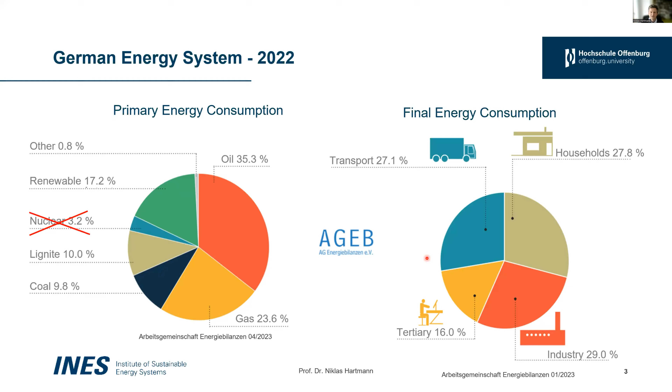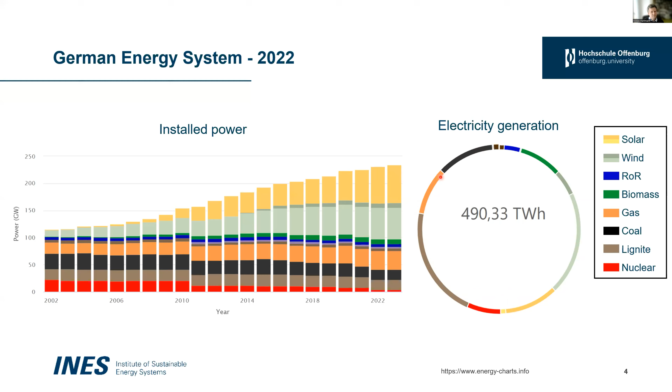And on the other half of this pie chart, you see the conventional and nuclear generation, heavily dominated by lignite currently. And this is, of course, a result of the war in Ukraine, having our gas system considerably reduced during the last 2 years to roughly 10%. Okay, so this is the installed power and the electricity generation in Germany.

And I'm coming now from the current status to our climate goals in Germany. I want to show that by showing you the annual emissions of CO2 equivalents in this graph, for different demand sectors: the energy sector, industry, buildings, transport, agriculture, and waste from 1990. We always compare our climate goals to 1990 in Germany. And we started with 1,200 million tons of CO2 equivalents. Sorry, there's a 'millions' missing, here it is. We declined up to date to roughly 700 million tons of CO2 equivalents.

And then we set out a path to the year 2045 to reach climate neutrality in the German energy system, having clear sectoral goals for the years 2030, 2040, and even in between. So that's where we are heading in Germany, reaching climate neutrality in the year 2045. And you see some interesting aspects here. Some emissions are highlighted in the agricultural sector, which are very hard to decarbonize completely. So we are expecting some negative emissions, especially in the energy sector and maybe also in the industry sector, which is of course heavily debated. Okay, so this is our path into the future.

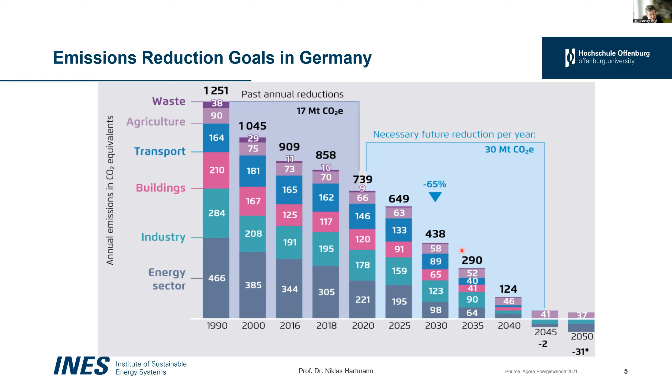And what are the key aspects of this model? The model works myopically. So we start with the year 2020. We have the current status of Germany built into the model. And then we optimize on an annual basis the power generation and the expansion of the whole system.

And I'm just naming some highlights. Anas will go a bit into detail. Here, where are we good with this model? We are good in showing the regionality of this transition path.

Yeah, we can have regional limits for certain technologies integrated. We can have regional potentials and also overall potentials for the German energy integrated. And we can combine it with some CO2 cap limits and also some CO2 tax limits over the years.

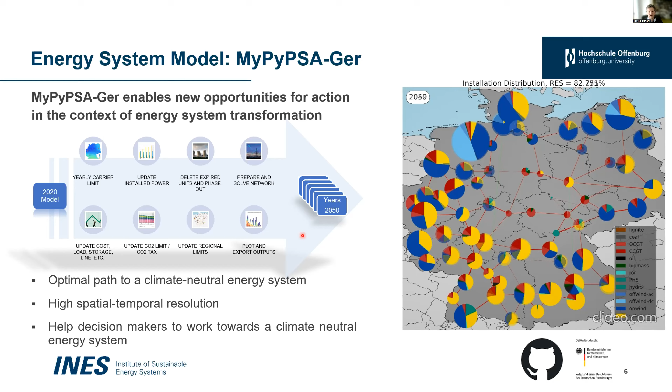In the end, we will work annually our way through till the year 2050, having a decarbonized system, hopefully, in the year 2050. Okay, that much to the model of the German energy system. And I want to give in 2 to 3 minutes the basis of the transition path. Anas will also work on the industry sector.

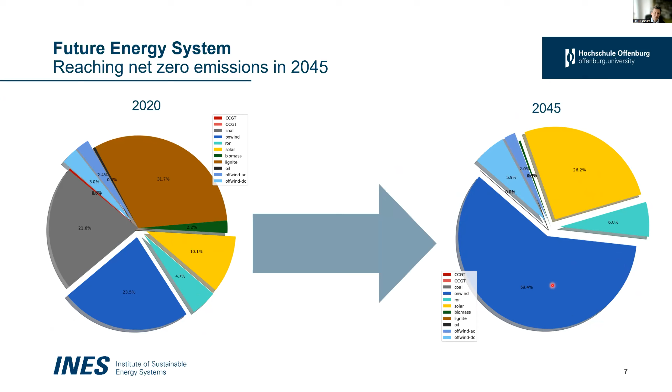And in the end, this will be transformed within the model to the year 2045, fully dominated by renewables. Of course, wind onshore and wind offshore are the key technologies, including solar PV, for a renewable system in Germany. If I go a bit into detail, I just want to highlight a few aspects of this transition path.

What we can see, of course, and this is an input to our model, we force it to have a coal phase-out until the year 2035. We have an agreement and a law in Germany phasing out coal until the year 2038, but there are high chances that we get it done much faster. So there's the chance to get out of coal anywhere from 2030 up to 2038. So we force the system to run out of coal in the year 2035.

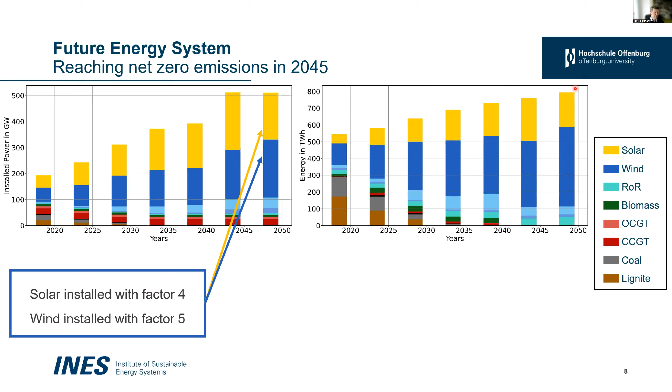The last thing we can quite interestingly see, and I'm coming now to the flexibility demand, is that mainly CCGT, so combined cycle gas turbines, are used as the main flexibility, of course running out of the system during 2040 to 2045 to fully decarbonize it. Nevertheless, until then, CCGT is heavily used just as a flexibility. So not in major generation parts, not in terawatt hours, but on a small scale in temporal resolution, ramping up CCGT to add flexibility to the system.

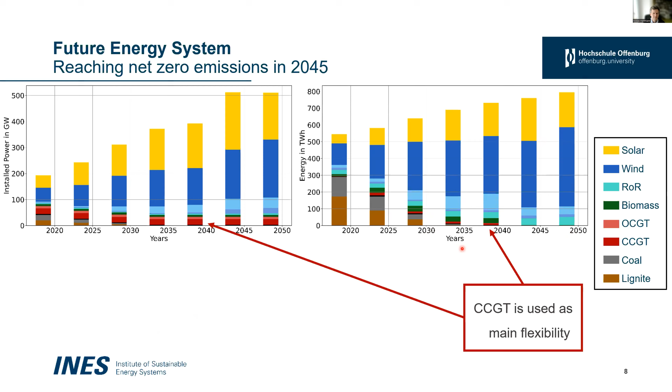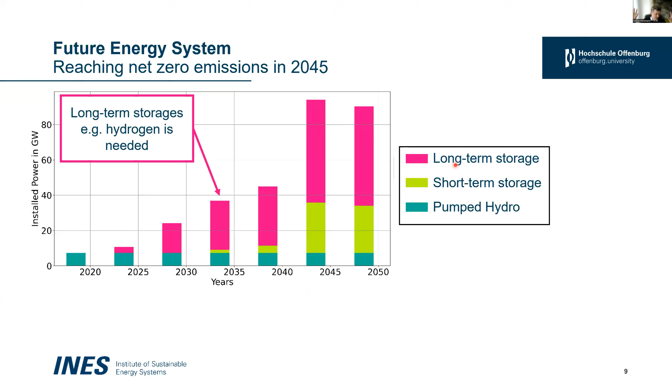Looking at other forms of flexibility, we see in our model that there's just a huge demand for flexibility. Now, in Germany, we have roughly 7 gigawatts of installed pumped hydro storage. To cope with that renewable system, we need to ramp it up until the year 2045 to 80 to 90 gigawatts of installed capacity, interestingly focusing mainly on long-term storage. So we have the picture of a hydrogen storage, weekly, a bit higher storage capacity, but for us it is a long-term storage. That's the first need.

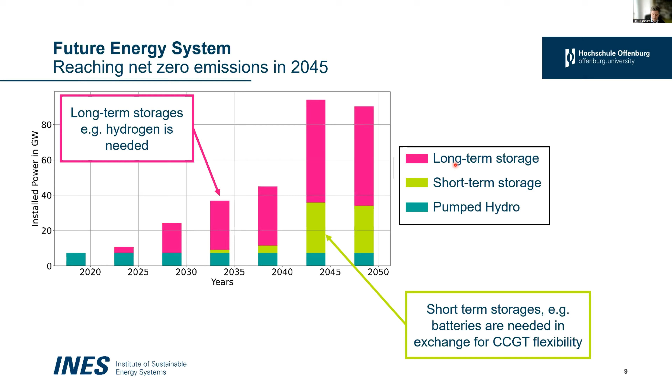The second need, coming in the year 2035, is also some short-term storage. And in our model, the short-term storages then take over the flexibility generation of CCGT, which I showed in the graph before. Short-term storage, just for everybody to have a picture behind it, would be batteries, very, very short-term.

All right, a quick summary before I hand over to Anas: in the long term, a system with 100% renewable energy is possible, but highly demanding and challenging. Of course, everybody knows that, hopefully. And flexibility, as we see in all our model runs, is or will become a crucial element in the RES-dominated energy system. So whoever handles flexibility correctly is basically the winner of the future energy system. Battery storage and hydrogen are needed on a large scale.

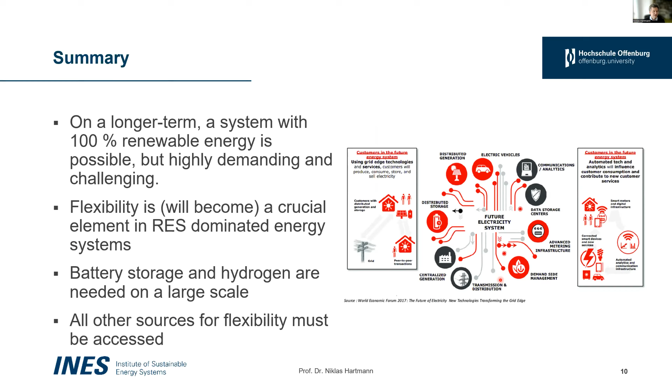And then very importantly, and that's why we did that model, that project, is we need to tackle all other sources for flexibility. With that picture on the right-hand side of a future energy system, from the World Economic Forum, a bit old, but you see all the possibilities. One possibility, demand-side management within industry, especially within small and medium-sized industries, has not been researched very much, and that was the focus of our project. With the climate stripes of Germany getting warmer and warmer in the last years, I want to hand over to Anas for the second part of this presentation.

Thank you, Niklas.

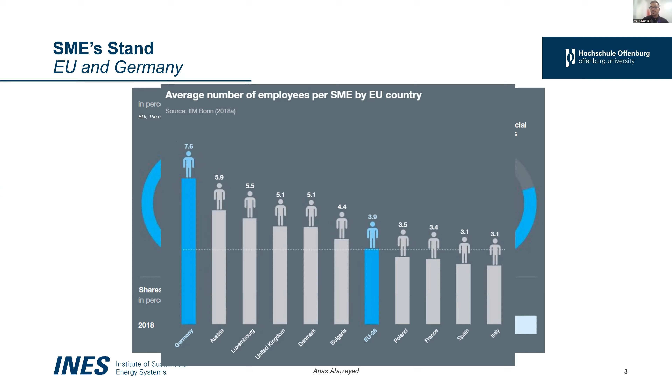So if you look at the current status now, we have roughly 360 or 370 terawatt hours of electricity into the industry. But by 2050, this is expected to increase heavily. There will be a huge electrification process, with a significant increase in efficiency and productivity. So there is a constant progression of the total industrial energy demand, but the energy carrier itself is changing. We see that there is more electricity being involved in the system.

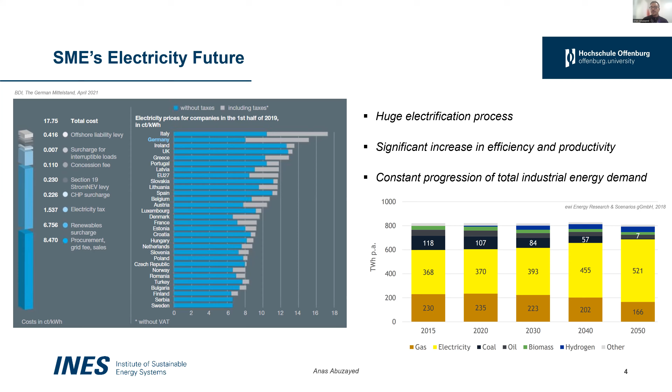Looking at the actual SMEs, the enterprises, the demand there is very heterogeneous, and detailing the electrical demand is usually very difficult, very demanding, and mostly neglected. The spatial and temporal characteristics of these demands, especially in Germany with this vast amount of enterprises, would make a big difference in the energy system modeling or analysis. However, mapping this difference is basically needed and should be included in most of the models. So that was what we tried to do in this project.

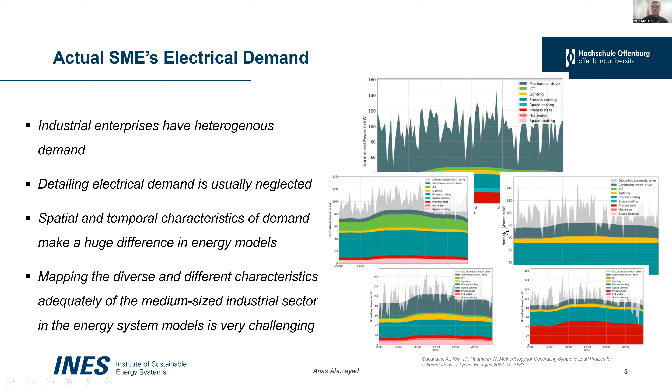So the motivation of this work, in bullet points: first, what is the impact of this SME flexibility on the national energy transformation goals? And on other flexibility measures - we saw what Niklas presented, that there would be a massive demand for flexibility. Conventional flexibility will no longer be valid or present in the system by the decarbonized future, so we need to explore other flexibilities. Another part of the motivation is how can this flexibility from SMEs participate in network congestion management and secure the supply of electricity? And most importantly, how can we quantify or analyze the flexibility from the demand side, from the industry?

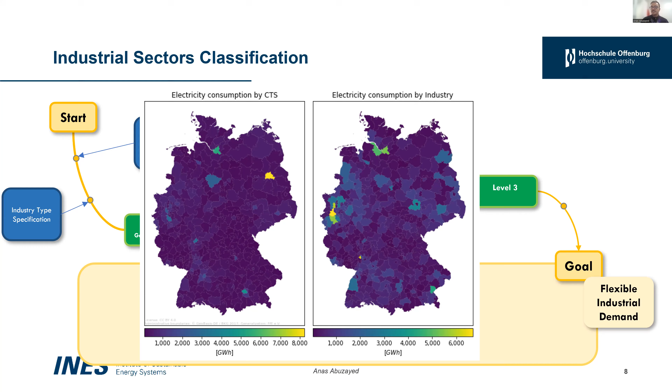So moving to the model development, how we mapped the electrical demand from the SMEs - just briefly, I want to show it. We have the goal of having flexible industrial demand within our model or system. So we start with having a spatio-temporal disaggregation per industry type, since we have different industry types in Germany. Then we have a general aspect in there - how can we proceed? We have different regionalities. As Niklas already mentioned, the main feature of our model is the regionality in Germany. This is very German-specific, that different regions have different demands, different SME contents, different companies in them. So this is very important to map inside the model.

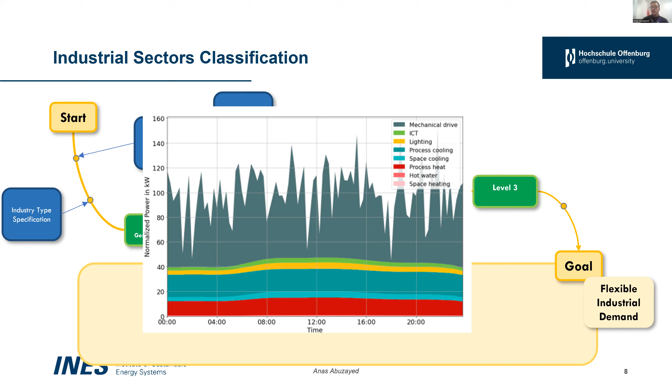Secondly, we have the synthetic load profiles and the industrial load profiles that need to be mapped within the model, by having different processes, different times, different regions. How can these basically differ temporally inside the model. Finally, after we have the industrial load profile, we need to have the end user classification and the disaggregated load profile inside the industry.

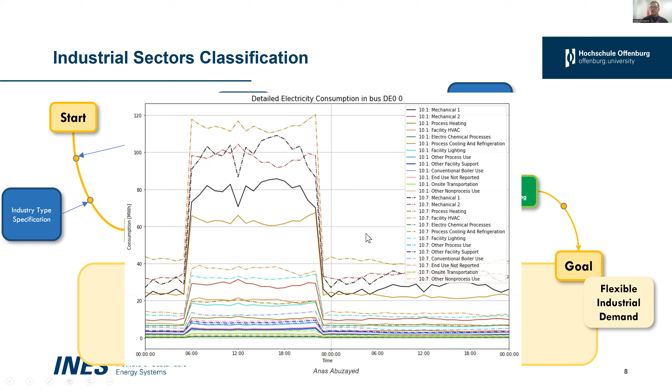So basically, this is how it looks like inside our model, with a very high detailed level of end user classification of the processes within any industry. You can see different processes such as mechanical, heating, HVAC, or electrochemical processes. All of these are mapped within our model so we can then assign flexibility to them.

By having the industrial flexibility within, just as an illustration of our model, we have an inelastic load within any node or any bus within the system. And we have different flexibilities, which also differ per time, temporally, and spatially. They are very different from location to location, from region to region.

This is again fully automated, fully open source. Anyone can use it, and it's all based on open source libraries from other institutes that we developed over the last 3 years, so that people can also enhance it, work over it, or use it in their own research.

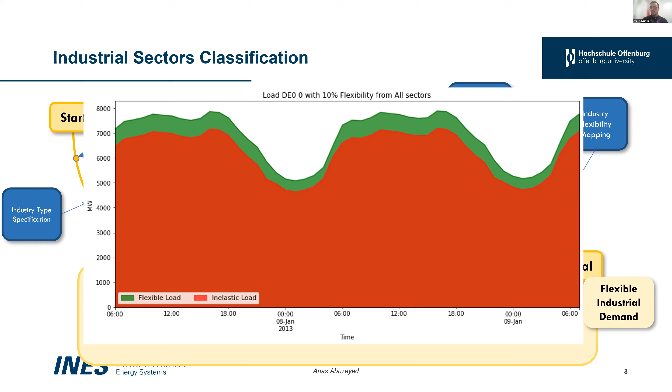Moving to the scenario settings of the flexibilities, we defined 3 pillars of the SME flexibility, namely the potential, the cost, and the duration.

We have different flexibility potentials from 5% to 20% only of the full load of 3 SMEs, or 3 SME categories. Not all the SME sector or all the SME companies — we only chose the food sector, the machinery sector, and very limited SME participation in this. We just wanted to kind of see a proof, does this work or not?

We have different cost assumptions and different temporal settings. I think eventually Jan Nicholas will talk about how these potentials were triggered inside the SMEs. We basically worked together with our colleagues from Fraunhofer IPA to come up with these different settings.

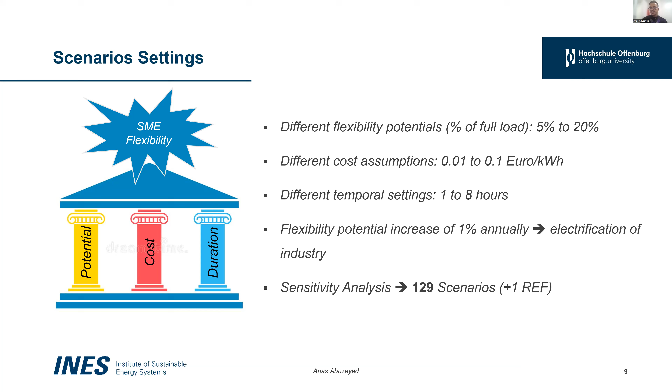Inside our scenario, to represent the electrification of the industry, which is expected to be massive, we have a 1% increase annually in this flexibility potential. By running a sensitivity analysis, we end up with 129 scenarios plus 1 reference scenario with no flexibility, or no SME flexibility.

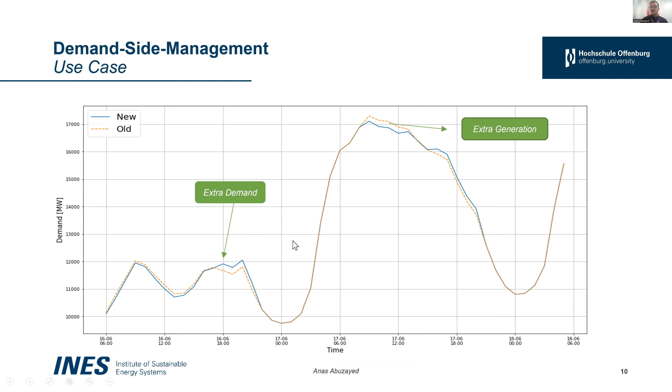So just to show a brief proof of concept, basically this is a typical load shifting where we have extra demand at low demand periods and extra generation at other periods, comparing 2020 to 2050, just to show how little the SME flexibility is that we introduced to the model.

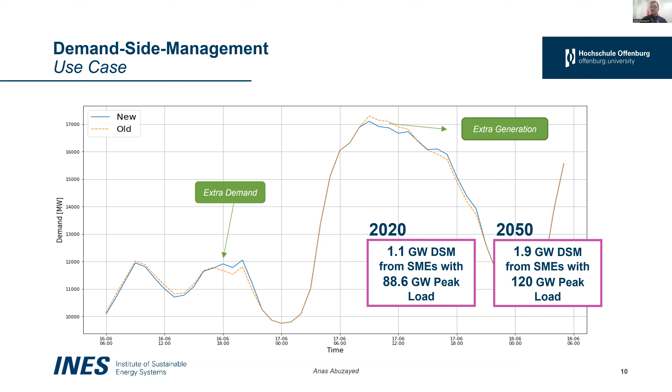So we have 1.1 gigawatt demand side management from SMEs. This is the maximum available flexibility from SMEs out of the 88.6 gigawatt peak load currently in status quo. In 2050, we move up to only 1.9 gigawatt out of 120 gigawatt. So we want to establish here very minimum participation from SMEs, and show whether it really affects the flexibility measures or the national energy system.

Moving to the results and discussion. First, if you look at the figure on the right, we have on the x-axis the flexibility duration from 1 hour to 8 hours. This is basically shifting up to a maximum of 1 shift from 1 hour to 8 hours.

The different colors represent the different flexibility potentials of the SMEs, or of the full load of SMEs. We can clearly see that with fewer hours, or less available flexibility duration, even with higher potentials, it was not used. So the flexibility utilization share represents how much was actually used from the available SME flexibility.

Moving to longer duration, starting roughly from 6 hours, it nearly hits 90% as a minimum. This means with more duration, we tend to use all of the flexibility that is available from the SMEs. So we end up saying that basically 20% can be more than the system needs if flexibility is only presented as a potential.

Repeating what Nicholas said, with higher potential, we tend to have less other measures or flexibility measures from hydrogen and batteries. Moving to the duration of the flexibility, this means we need longer term flexibilities, such as hydrogen facilities, and these help heavily with reducing the CO2 emissions of the country.

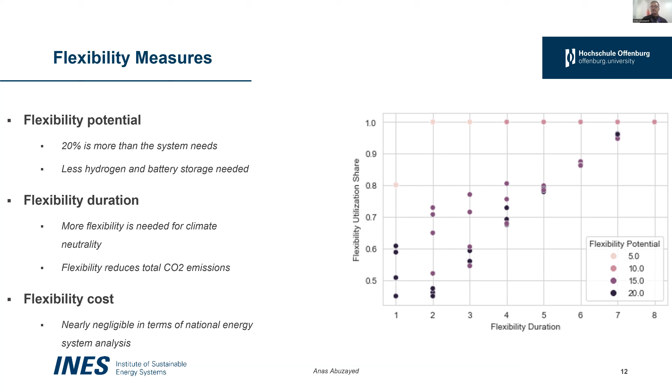Talking about the cost of the energy transition, we can see clearly how the system behaves from 2020 to 2050. We saw it in the last year, especially with the war, that the conventionals, or let's say the prices, explode with the current market because it's heavily based on conventionals.

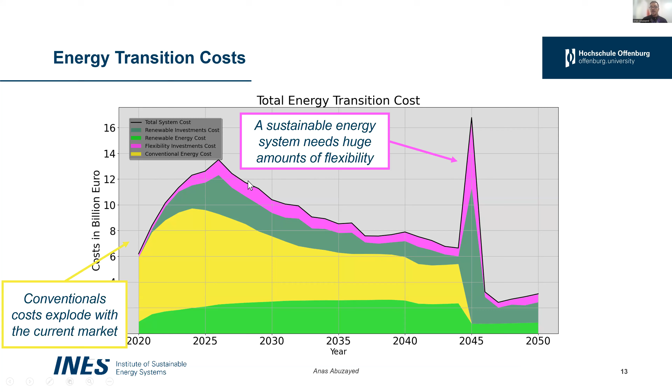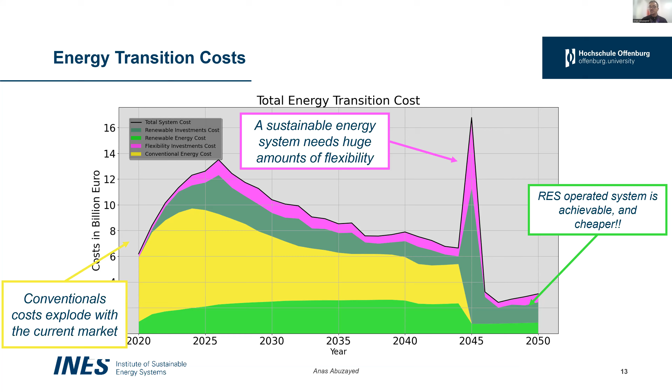Stating the clear, a sustainable energy system would require a huge amount of flexibility. We'll see in the next figure exactly what this flexibility is, and a renewable-based or fully dominated system by renewables is achievable. Again, it's very challenging, but it is achievable and it's much cheaper in the longer term.

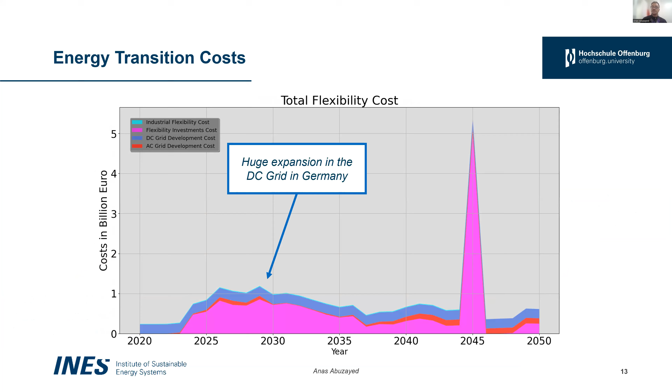Looking at the total cost flexibility, we can see that there's a huge DC grid development or expansion in Germany, moving the offshore wind from the north of Germany to the load center in the south. The investment spike that we see when we hit climate neutrality is due to the myopic behavior of the model, because it optimizes on a yearly basis, not with perfect foresight.

A shorter lifetime is what we have. Anything invested 15 years ago needs to be phased out this year. So there is a potential, if the technology is enhanced or developed in the future, that we don't see these problems. Mostly it's because of climate neutrality by 2045 that we need to change completely what we invested in before.

Looking at the flexibility from industry, we can see it's a very minimum contribution here. This means the energy cost, or the flexibility cost of industry, is negligible or can be negligible. This is something that we figured out or discovered from the analysis.

Most importantly, after we hit climate neutrality with the great amounts of flexibility from hydrogen, or from long and short-term flexibility or storages, we don't really see a use for the industrial flexibility within the system. Again, this is not a solid conclusion or takeaway from this analysis, because as I mentioned before, it was less than 1% of the whole peak load from the industrial flexibility.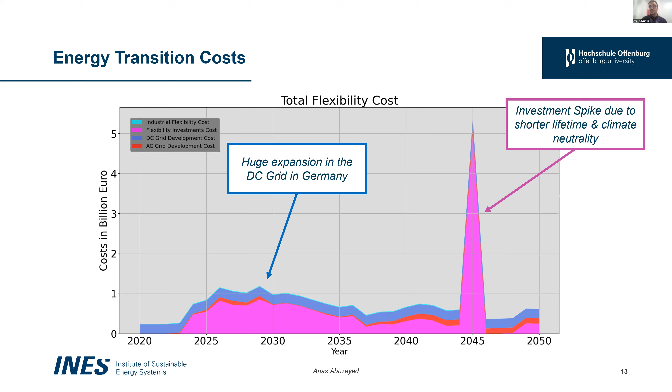To sum up my presentation, or my work, we see that the flexibility from SMEs contributes heavily to network congestion management, so the load shedding. We see that less favored DSM settings, meaning less favored cost or potential, so higher cost, less potential, or less duration, increase the dependence on other flexibility measures, such as hydrogen or batteries.

From our analysis, we saw that the flexibility from industry is usable and can be marketable, but it will not be enough. So we need more flexibility from other participants or other players within the system. Maybe more SMEs can come into play, or higher energy consumers.

And the need to temporarily shift energy can supplement these flexibility options. Finally, with the huge electrification, this implies that there is a big and even bigger potential for demand side management to be integrated into the energy system of the future.

With that, we can say that the most important finding of our analysis was that longer flexibility duration is more crucial than the flexibility potential. Normally, when we talk about flexibility, we tend to talk about the potential, but the duration matters more.

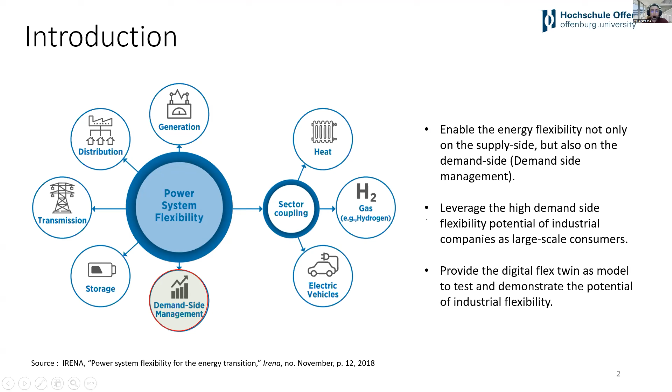The manufacturing system is the core process of any industrial company, in which we define all the resources and the tasks that matter in order to produce.

The other subsystem is the technical building services, in which we model all the media, the auxiliary services that are needed for the production, such as compressed air, the cooling system, the heating system, and so on.

Both subsystems need energy, so for that we need to model the energy system, in which we include all the energy assets available for the company, such as PV, wind, and so on.

The three subsystems are controlled by the energy and manufacturing control, in which we define the functioning constraints and the objective function of the optimization.

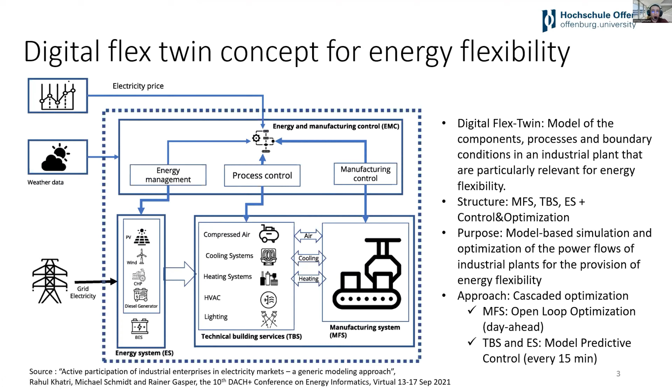The manufacturing system is based on the resources for this company: the machines, the products, the raw material, the storage facilities of the company, and the manufacturing tasks. So it's a resource task network of the company.

And then we model the technical building services needed for the production, such as the compressed air, the process heating, process cooling, and so on.

The third step is we model the energy system, in which we define all the assets available for the company, such as PV, CHP units, and so on.

And then we identify the energy flexibility measures. In this step, we identify which machine, which system is flexible and which system is not.

And the final step is for the optimization and the control. In this step, we define the constraints and the objective function of the optimization. So here we define all the constraints for the manufacturing system, technical building services, and energy system.

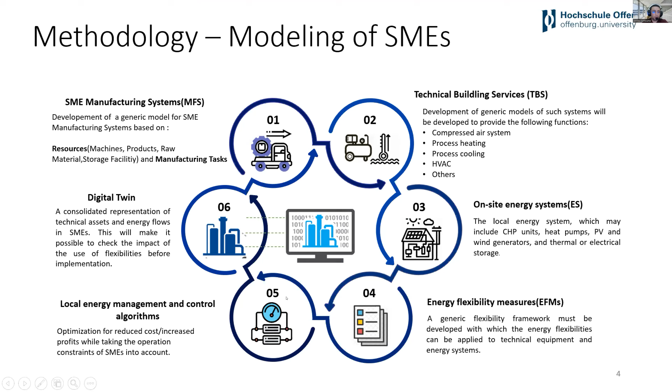Then we calculate the power balance of the system for each time step, which is the summation of the power for the manufacturing system and the technical building services, minus the energy assets available for the company.

And then the objective function is to minimize the cost of electricity for each time step by calculating the power multiplied by the price of the electricity at this time step, multiplied by the time step.

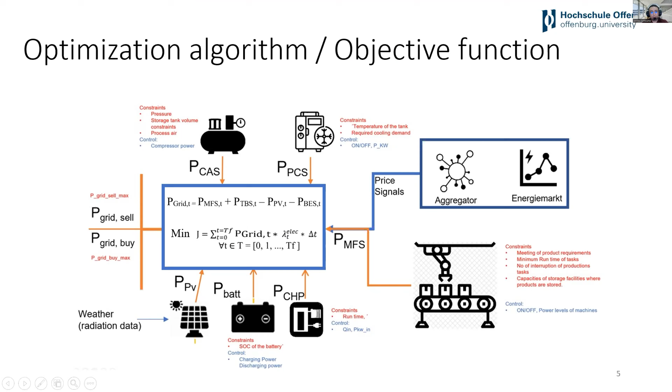And inside each subsystem, we create the machines. For example, for the manufacturing system, we create the machines that are available for this company, the products, and so on. For the technical building services, for each specific use case, if compressed air is needed, we create a compressed air system.

We define how many compressors we have, and also the air storage tanks, and so on. The same for the process cooling, the HVAC, and so on. The same for the energy system. For example, if a company has a PV plant, we define their PV plant in our digital twin.

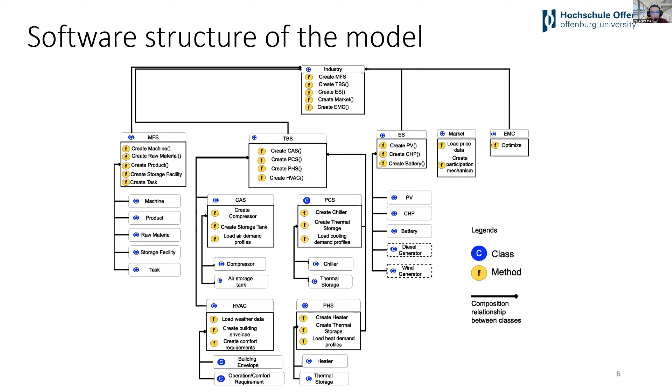So the cooling system is composed of 2 chillers that fill a central water storage tank. And for the compressed air, we have 2 compressors and one storage. For the energy system, we have PV and battery, and of course, the whole system is connected to the grid.

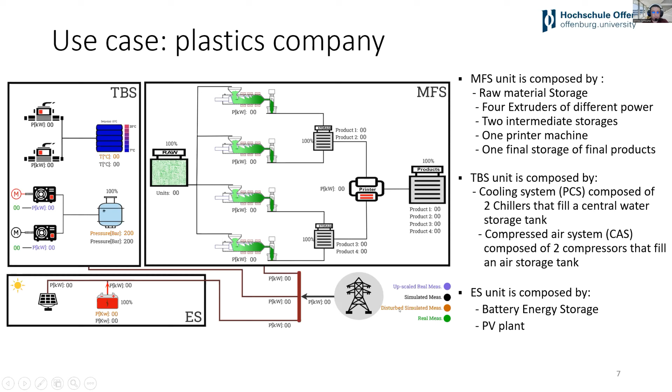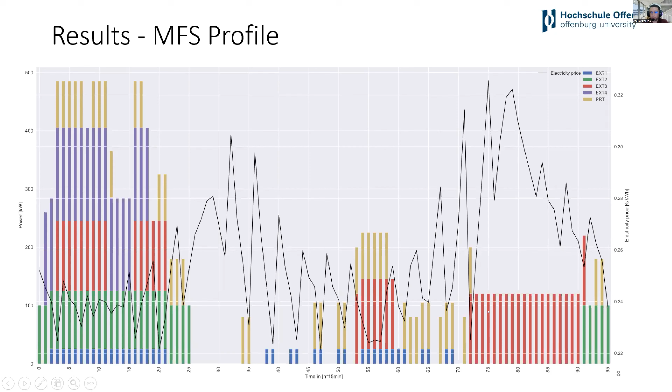And if we go to time step 75, for example, extruder number 3 is the only machine that is running. The same for the technical building services and the energy system. So here we have 2 price signals, in order to see the effect of a change of electricity price on the battery, on the compressors, and on the chillers.

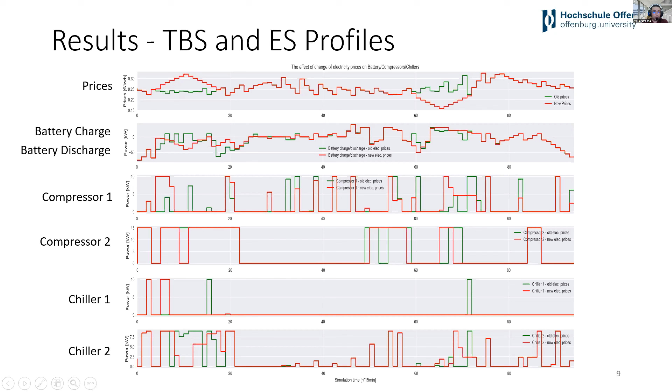So as you can see here, for the new price, for example, if we have a high price of electricity, the optimizer decides to discharge the battery and so on. So we can evaluate how the optimizer is reacting to the variation of the price.

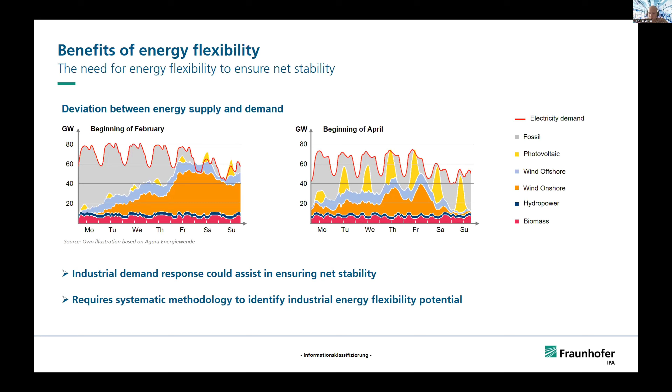But this does require a methodology or some way of identifying this industrial energy flexibility potential, which this presentation today is about. But this also has some positive aspects for companies. So here in Stuttgart, we see energy flexibility not only as a challenge, but also an opportunity, and also as an extension to conventional energy efficiency.

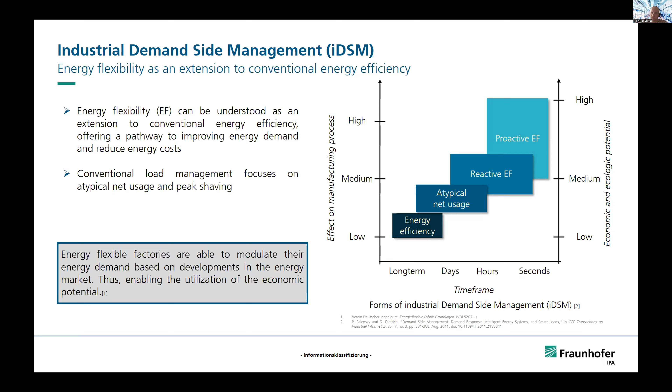With energy flexibility, this is more on a shorter time frame specifically, which does give companies the option to gain a lot of money and decarbonize their production systems, but it also has a big effect on the manufacturing process, which I will come back to later. So how can we achieve those goals, specifically those economic goals?

So when we talk about energy flexibility, we usually talk about different goals we try to achieve. Those goals sometimes exclude each other, but they're illustrated over here. So we can use energy flexibility to react to the volatility of energy prices, specifically negative energy prices, when we have a lot of sun or a lot of wind at the moment. But we can also use the energy flexibility to commercialize it proactively on energy flexibility markets.

So we can offer the flexibility capabilities to, for instance, companies that produce electricity, so they can buy this energy flexibility to ensure the stability of their net. Another way of utilizing energy flexibility is the maximization of local energy sources. So for instance, a combined heat and power plant, but also renewable energies, for instance, a local PV plant on the roof of the company.

Some more relevant goals which are already actively pursued by conventional load management are peak shaving, which we can use energy flexibility for, and also atypical grid consumption. And a topic that has been gaining in relevance, especially in Germany and Europe, is the question of resilience. So energy flexibility can also enable companies to reduce their electricity demand in the case of a partial blackout.

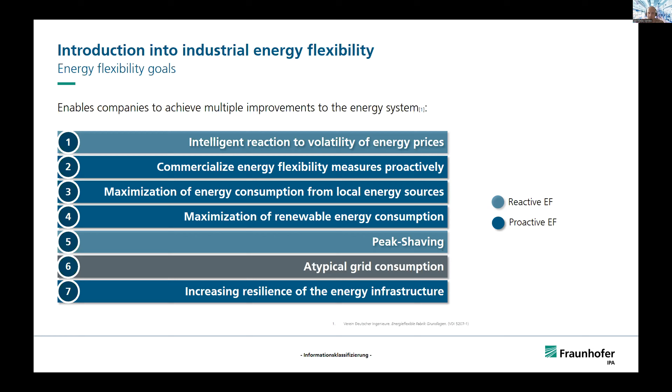Okay, I'm now going to talk about the methodology. Before we do this, Amin has already presented the systems which factories can be broken down into, but I would just like to quickly refresh on this. So when we carry out the energy flexibility audit, we typically look at 4 different systems. So we have the manufacturing systems, which are the production systems that are actually value adding to or creating the product. And we have the technical building systems.

I now realize it's in the name twice, which are the compressed air systems, the heat production, anything that converts energy into the energy media needed in the company itself. And we look at auxiliary systems, which can just be transportation belts, that kind of stuff. And then we have the energy and media systems, so looking at the energy flows into the company itself.

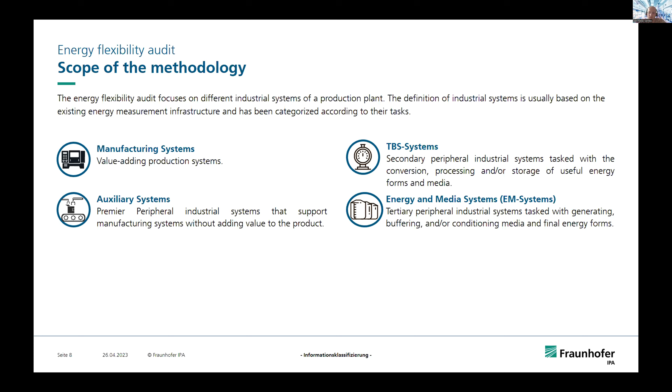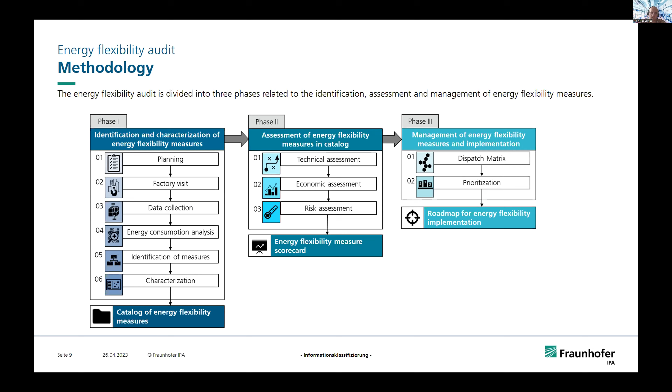The methodology itself is separated into 3 phases. The first phase is essentially just looking at the overall potential. The second one tries to narrow it down into a feasible potential, and then the last phase looks at the implementation, so tries to maximize and optimize the implementation of the identified energy flexibility measures.

So when we try to collect the entire potential in phase 1, there are certain steps we have to carry out to make sure that we look at everything. In the beginning, I said this approach was a systematic approach for identification. So we try to look at all the relevant systems in the factory to catalog the entirety of the energy flexibility measures. So we usually do a factory visit, so we can see the systems where they are located.

We do a very extensive data collection, and then we use all that data we collected. So we make sure we looked at all relevant systems in both those steps. Then we start the energy consumption analysis and the identification of the measures. And at the end of this phase, we have the entire energy flexibility potential. Usually that is somewhere between 10 or 20% of the entire energy demand of a company.

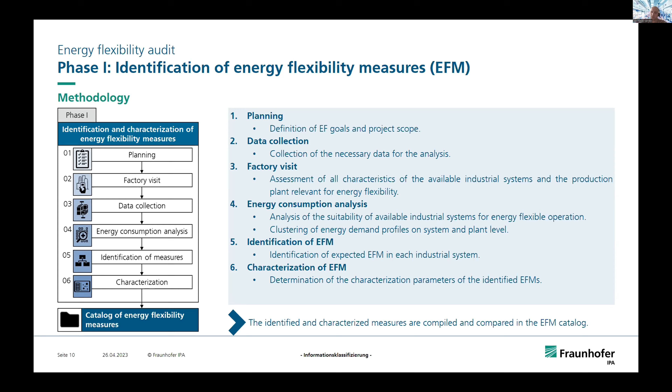And then in the second phase, we have to look at the energy flexibility potential and try to narrow it down into the feasible potential. So we do a technical assessment just to make sure that the technical requirements are met. This can be on the one side regarding the feasibility from the factory control system, but on the other side also looking at the industrial flexibility goals. So sometimes the flexibility is not high enough to pursue a certain goal.

Then we look at the economic assessment. That's very straightforward. So the projected annual net revenue when utilizing this flexibility, but also a risk assessment. So what is the risk of utilizing this energy flexibility potential on the manufacturing process, because a process interruption would be costly; we try to circumvent that by doing this risk assessment. And then in the end, we have the feasible energy flexibility potential.

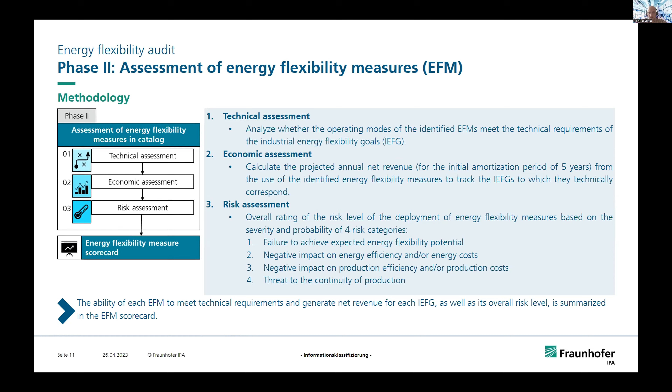And then we go into the third phase, which is very short. It's essentially just looking at the possibility of combination between energy flexibility measures, and then doing a prioritization, which is more for the strategy of the company when looking at the implementation of the identified measures.

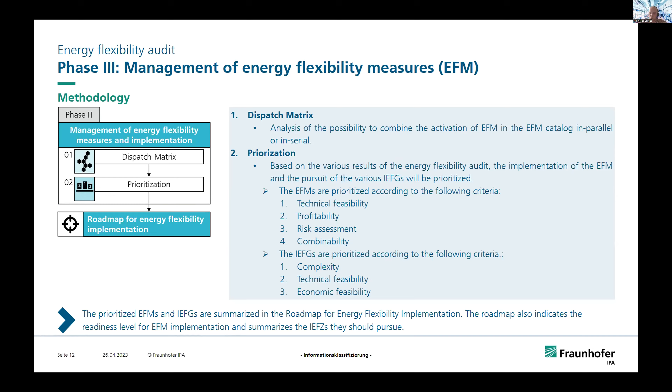So here's just a small overview of the possible flexibility measures. So we have the organizational measures. I'm not going to go too deep into it, but organizational measures essentially just require a decision by the factory personnel, while technical measures would require some sort of investment into a retrofit or new energy systems as well.

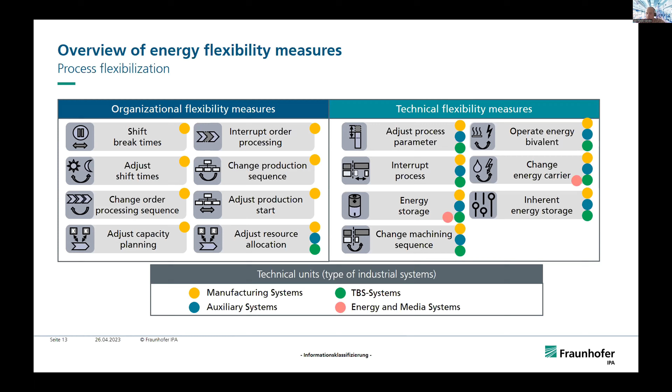So now I'm going to show 2 best practices. I have to hurry up. I see I only have 1 minute.

So as I said earlier, peak shaving is a very important topic, very much pursued at the moment. And as we can see here, this is a company that produces injection molding pieces, and they have a very significant peak in the morning between 5 and 6 a.m. You can see this in the profile ID number 4, and it's usually on Monday when they start up their machines. And through this data analysis, we could identify this and look at the potential measures to circumvent this.

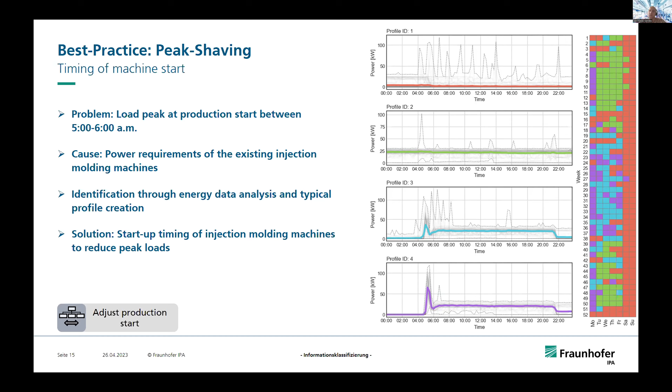And one potential solution to this was just adjusting the production start. So they had a lot of those machines, so they can just start those machines after each other. So the peak power in the beginning doesn't overlap, and they can save a lot of money this way.

So just by moving their shift times to later into the day, they were able to get a lot more of their energy supplied through their PV system. So this is another way that energy flexibility can be used to improve the energetic, but also the financial side of the factory as well.